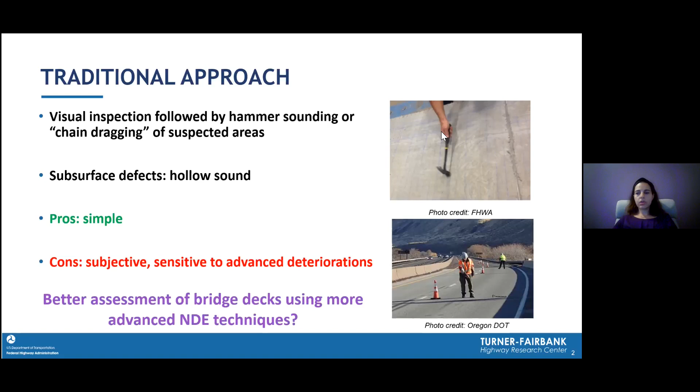So our overview primarily addressed bridge decks and bridge deck inspection, and how bridge owners in 10 states use NDE technologies. You can see the states on the map. This presentation is about how these 10 states use NDE technologies to assist them with managing their bridges and their assets more effectively. As part of this research process, each state also answered how FHWA can help the states with NDE knowledge and more NDE implementation.

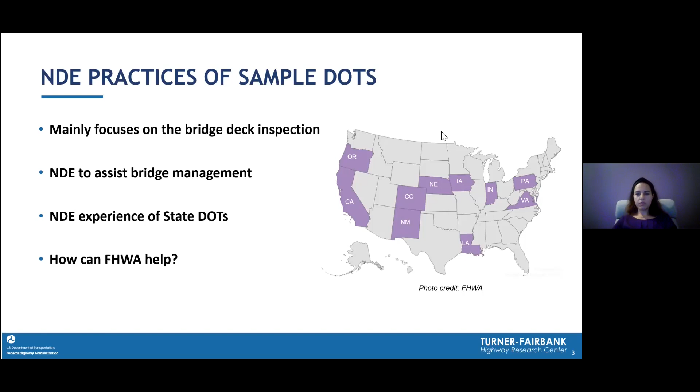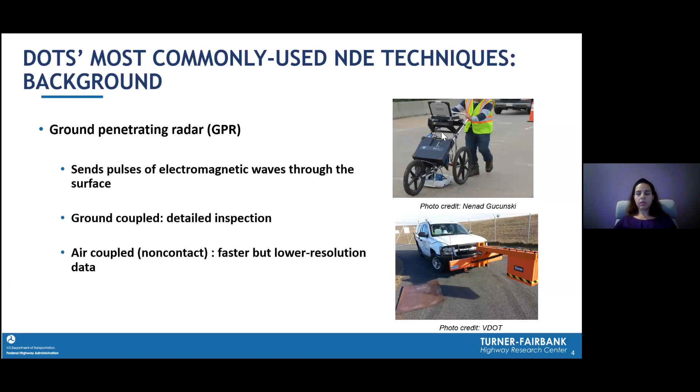Before I go to the current practices of states, I will go over the most common NDE technologies used by states. One of the most commonly used NDE techniques is GPR, ground penetrating radar, which uses electromagnetic wave pulses in the microwave band of the radio spectrum to image the subsurface features in the bridge deck, pavement or tunnel. The radar reflections from inside the material are then imaged to evaluate the condition of the medium. GPR can be ground coupled or air coupled. It can be attached to a vehicle and move at traffic speed, but it provides lower resolution in exchange for speed compared to ground coupled.

Another common NDE technique is infrared thermography, which images the temperature of the subject and the flaws in the bridge deck, tunnel or pavement. It cools and heats at different rates, so it provides a surface image of the location of the flaw. And the last of the most commonly used NDE techniques by the states is impact echo, which is an acoustic based or stress wave based NDE method in which stress waves are transmitted into the material or medium, and then reflected back from the flaw, delamination or damage.

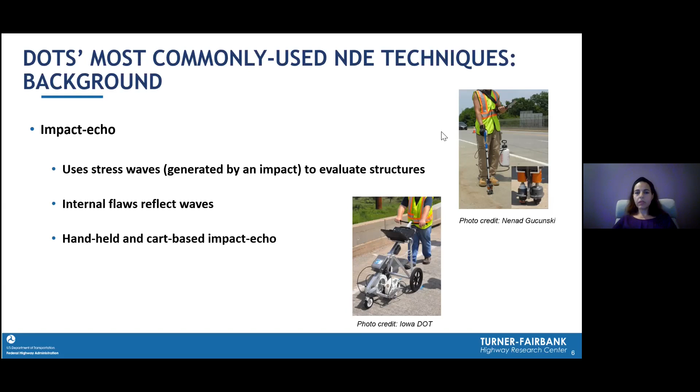So now we move to the states. First one is California. While California DOT, called Caltrans, is researching and starting to implement newer NDE technologies, the agency's bridge deck inspection primarily is visual inspection. Like most state DOTs, Caltrans supplements its visual inspection with some visual aids like spotting scopes. As a follow-up to the visual bridge inspection, they do hammer sounding and chain dragging to further evaluate suspect areas.

They have a high speed inspection program in place for pavement inspection and crack detection. They have cameras to collect surface images of pavement and bridge decks, and then they apply artificial intelligence technology to identify details like crack location, crack width, and the density of the cracks on the surface. They indicated that the program is highly effective, especially in urban areas where it is difficult to close lanes for visual inspection.

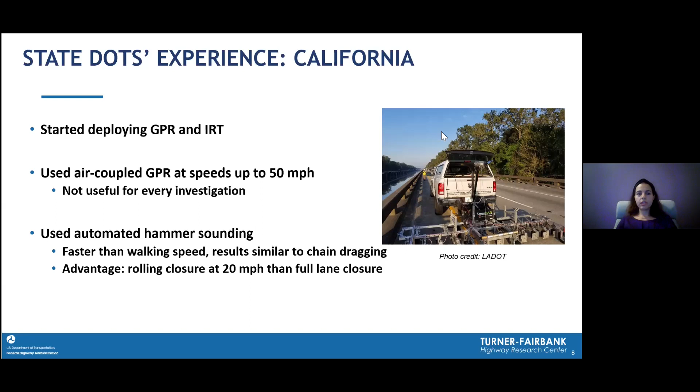Caltrans is also employing advanced NDE techniques like infrared thermography and GPR. They reported that the air-coupled GPR enables an increase in the data acquisition speed up to 50 miles per hour, which is around 80 kilometers per hour. However, it's not appropriate for every investigation; it depends on the application or the target of investigation. The agency also investigated automated hammer sounding. This technique was faster than conventional hammer sounding at walking speed, and yields similar results to chain dragging, but at higher speed. The main advantage is that they can do it at like 20 miles per hour, so instead of a full lane closure, they can do it at a faster speed.

In terms of barriers to NDE implementation, Caltrans indicated that the primary limiting factor is resources. With the number of bridges in California, current application of advanced NDE technologies is better focused on project level application or investigation of known problems. They are not currently using these technologies for all the bridges, just at project level, and not routinely using GPR, IR, or any other NDE technologies for bridge deck evaluation or inspection. The agency indicated that GPR is a good tool, but it requires significant training and experience to use effectively. Similarly, IR is helpful and is a complementary tool to GPR, but they need some internal development to deploy these technologies.

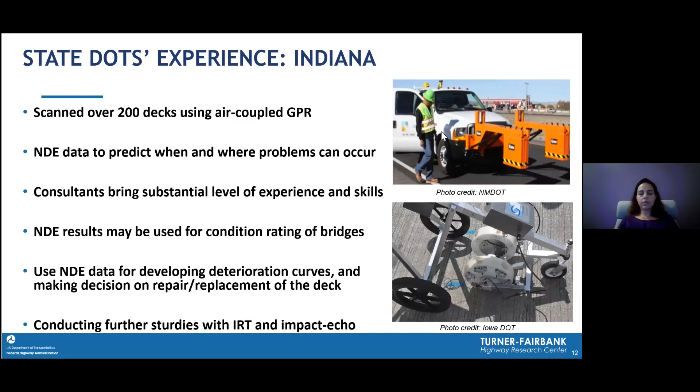Then how can FHWA help further NDE knowledge and implementation in Indiana? They noted that more emphasis should be given to support practitioners on how to best apply various NDE technologies, including the collection, interpretation, and management of the data. And they need recommendations to address variables affecting the NDE data, such as state geographies, weather, different types of treatments, and aggregates in different states.

The next state is Iowa. For bridge deck inspection, the Iowa DOT employs sounding as their most widely used technique. And they indicated that they get repeatable and understandable results from sounding. While almost all of their inspections are done manually, Iowa DOT has also investigated an automated hammer sounding system to speed up the inspection.

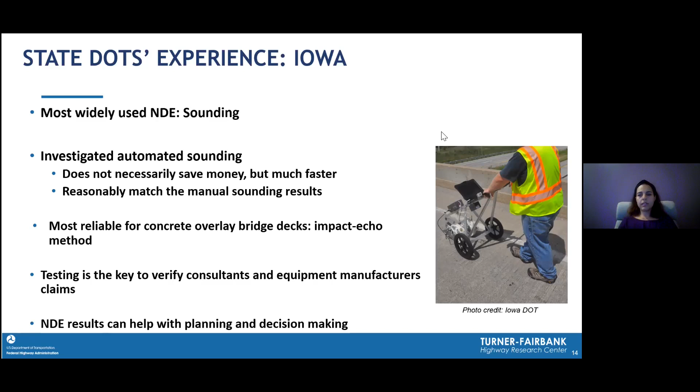And they found that validation testing, such as coring, is the key to determine if an NDE technique does what consultants and manufacturers claim. They believe that NDE can help in planning and decision making, but they have not done any return on investment analysis to quantify the added value of NDE. When asked how FHWA can help, they reported that more work to evaluate the effectiveness and validation of various NDE methods is necessary.

They welcome advice on how to pick the most suitable and the best NDE system based on their particular inspection problem.

The next state is Louisiana. Louisiana DOT, or LADOT, has experienced a culture shift toward the use of NDE technologies. They believe that chain dragging is an aging technology, and only more experienced inspectors still use it. And actually, the new generation of inspectors does not view chain dragging as the best technique.

One reason is that LADOT has the third highest bridge deck area in the country. With such long bridges, some more than 17 miles, which is around 30 kilometers long, it's not practical to chain drag all the decks. So the agency has moved toward NDE, and they rely heavily on NDE techniques to help them identify potential problems within the bridge deck. They use high-speed GPR and IR to minimize lane closures and as a way to prioritize which bridge decks need work.

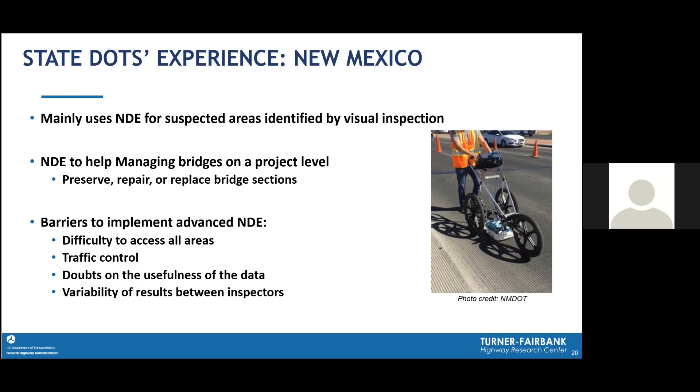One point that they mentioned was that, for example, GPR is not a magic bullet. It offers value when applied appropriately, and it can help determine whether a deck is a candidate for preservation versus replacement. They noted that GPR works well as a first pass, but a second, more in-depth scan or technology is necessary to produce more detailed results that are critical for decision making, whether to preserve, replace, or repair the deck.

For overlay inspection, NMDOT indicated that chain dragging is the most reliable technique to detect the debonded overlays. And GPR seems to work in seeing through asphalt and epoxy overlays, but does not appear to do a good job with the latex modified concrete.

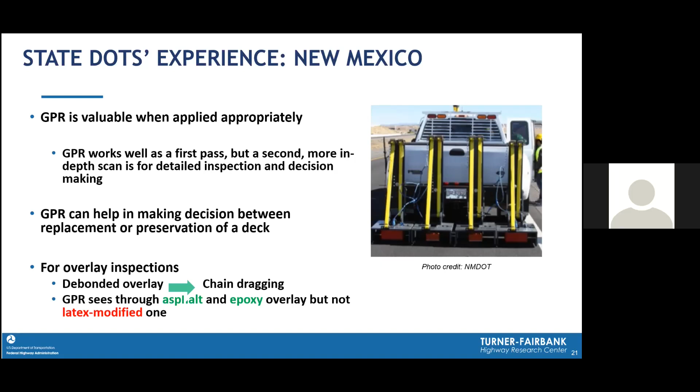How can FHWA help? They indicated that FHWA could contribute to NDE training and education opportunities, particularly because of the turnover in NMDOT staff and lack of internal resources. They also need assistance to get information about advances in NDE technologies through webinars, videos, peer exchanges, meetings, etc.

And finally, they indicated that it will be important to keep expectations reasonable when comparing NDE lab performance and real-world NDE performance.

Oregon DOT, or ODOT, reported that they extensively employ chain dragging on concrete decks, and they use magnetic particle inspection and ultrasonic inspection on steel bridge elements. After performing some experimental projects using advanced NDE methods on concrete, the agency concluded that chain dragging will perform the same inspection as the more advanced NDE methods and do it faster and cheaper.

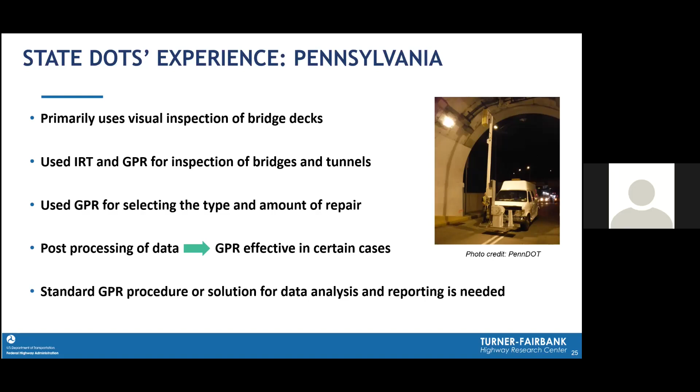They also performed some tunnel inspection using NDE. The goal was to demonstrate and evaluate the ability of handheld NDE methods and high-speed mobile scanning methods, such as air-coupled GPR and vehicle-mounted infrared thermography, to detect deterioration in the tunnel lining. They also tested traditional physical inspection techniques like hammer sounding and coring in some limited cases to evaluate the high-speed NDE results. So they concluded that no single technology by itself can provide all the information they need to assess the condition of tunnel lining.

They believe that the best application for NDE technology is to use one or two NDE methods in combination with traditional hammer sounding. They noted that while GPR correlated well with hammer sounding, it doesn't seem to be a practical solution over traditional physical methods for visual inspection because of the cost and time required for data processing. But they also noted that the cost and time may be reduced significantly during subsequent NDE inspections because the test procedure is already established. So the cost would be decreased in future inspections.

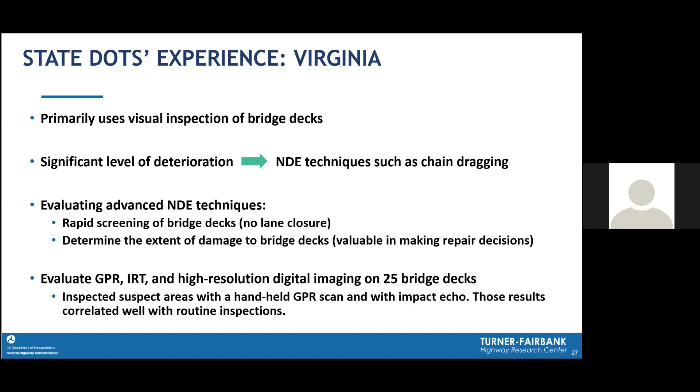They also performed NDE research in several other areas, such as time-lapse IR and magnetic flux leakage inspection. MFL, or magnetic flux leakage, is a method where a magnetic field is introduced in a steel cable or tendon, and then magnetic field sensors are used to look for leakage that represents potential underlying damage. These are not routine inspections, and they are only used for a few special investigations.

For example, VDOT noted that they employed a magnetic flux leakage NDE system to inspect some post-tensioned tendons with some potential problems, and they got good results and verified the technology in the lab on a few mock-up tendons with pre-built defects. And again, they found excellent correlation.

They also reported that their approach in applying new NDE technologies is to conduct research first and then perform some trial projects on the more promising technologies, and finally look for the best potential application of the technology. The agency usually performs initial implementation of the new technologies with the consulting companies. So they want to implement the new technologies to reduce the lane closure and save money, but they first need to validate the technology performance and then go to enhancing the technology.

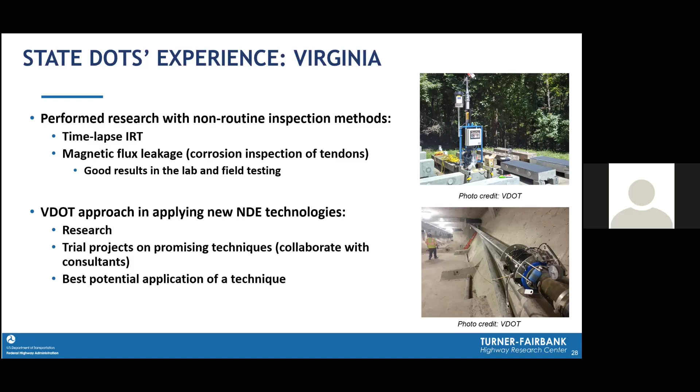There were many cases that VDOT reported where they saved money. In one example, initial tests showed that there may have been an issue with the cover depth of the reinforcing bar, and the more detailed scan with GPR revealed that the entire top rebar mat had sunk due to the misplacement, and it left a thick, unreinforced layer of concrete at the surface. So the contractor replaced the entire deck before the bridge was put in service, which avoided future problems and it saved cost.

And finally, when asked how FHWA could help VDOT, the agency stated that open communication and discussion help states to keep up with what NDE technologies are being used and what new technologies are emerging for potential future application. So in summary, our review provided a snapshot of how 10 states use and evaluate and implement both basic and more advanced NDE methods as part of their bridge inspection and management program. All states have applied NDE techniques at some level. Several of the sample states have successfully established advanced NDE technology.

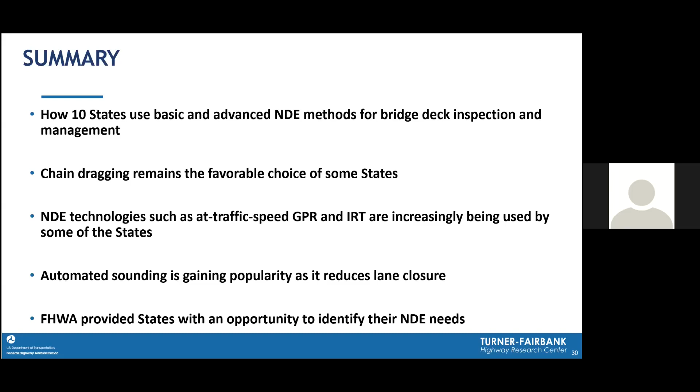So we at the Federal Highway NDE program thoroughly evaluated and prioritized these recommendations from the states to ensure that the NDE program is addressing the needs of the states. So we recently published the NDE program strategic plan that has incorporated the states' needs. This strategic plan consists of 3 goals and objectives and a list of strategies to meet these objectives. So the first goal is related to stakeholders, to enable effective application of NDE technologies. And the second goal is technology related.